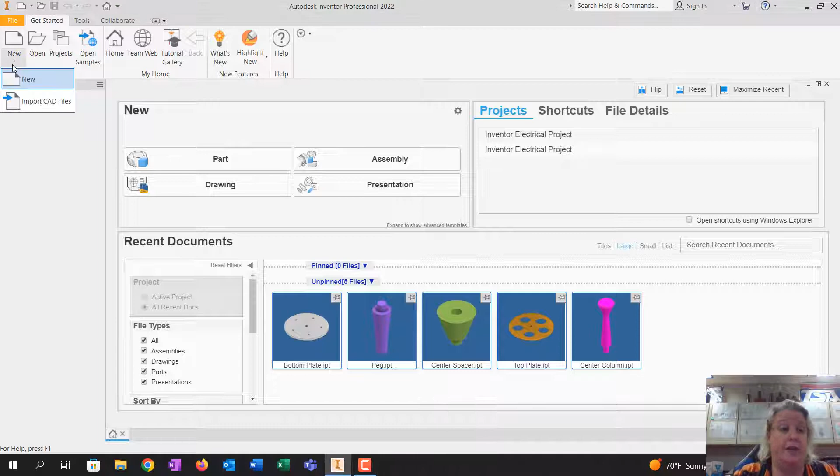So let's go ahead and do the assembly file. We're going to go new, and we're going to pick standard IAM, which is the 3 blocks. Hit create.

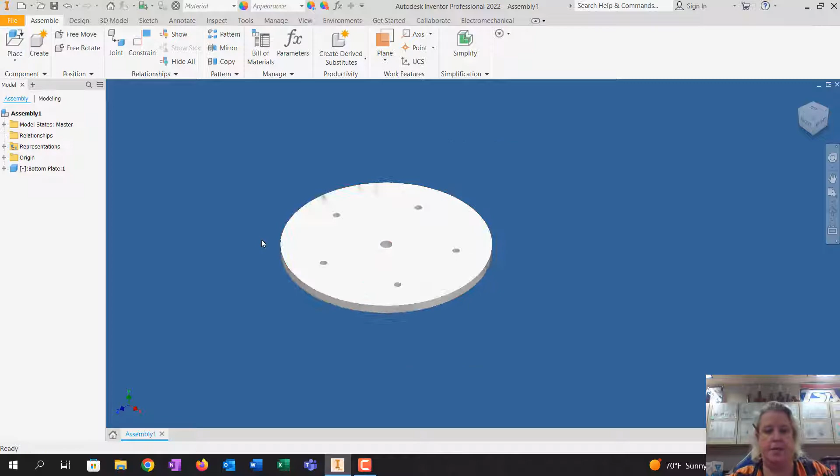We're going to click on place, pick place. Navigate to that folder that you made on the desktop that hopefully you named beverage holder. Select your bottom plate, click open, hit escape, zoom out. Remember, you want to try and keep them from not touching each other - it just makes your life a little easier.

And I'm going to put all these pieces in. Now the top plate is coming in. Now those pegs, you need 5 of them. So I'm going to click on peg, and then I'm going to click 1, 2, 3, 4, 5, and then hit escape.

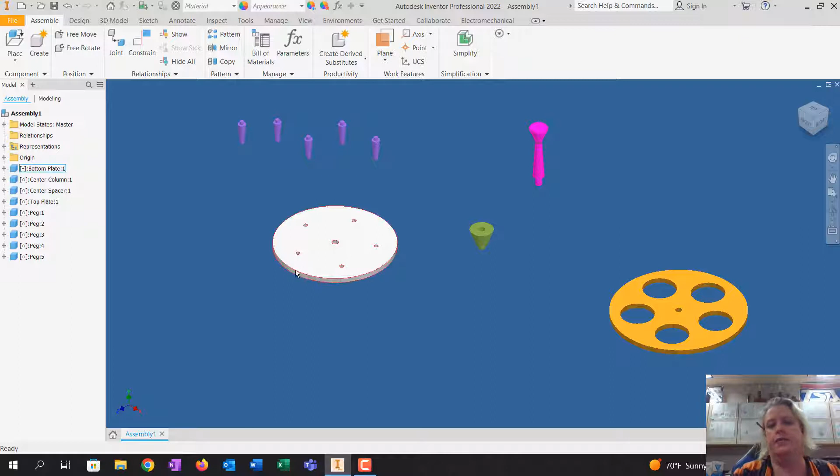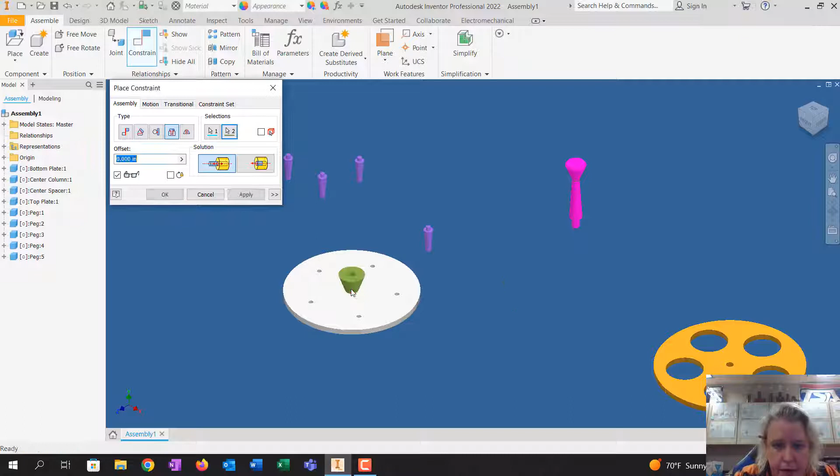Okay, so we're going to use the insert constraint, and I'm going to put this guy in first. So I'm going to click constrain, and I'm going to use the insert constraint, which is the one that looks like a screw. Then I'm going to catch this circle here, because this is the one I want touching the top here. And see how it fits in nice and neat, and it gives you that little click - that's what you want to hear.

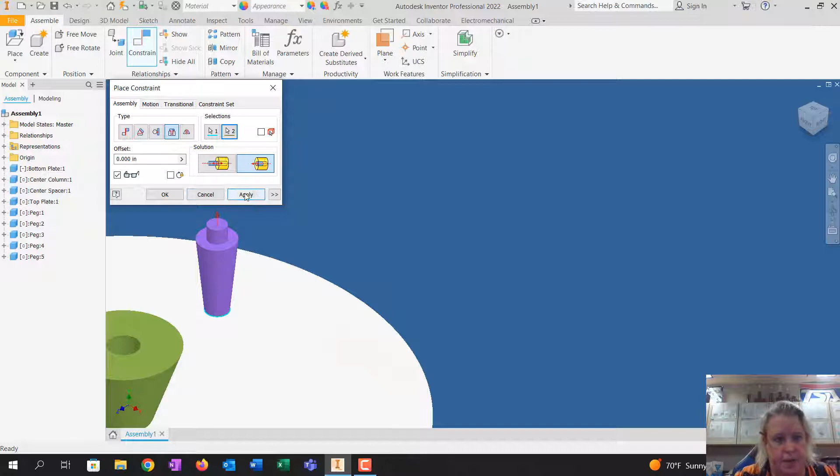Now the pegs can be a little tricky. Again, insert. I want that circle touching this circle, and see, it wants to go in upside down. So you can click this and that'll flip it. And to make sure you did it right, when you flip it over, you should be able to see it.

All right, constrain, insert, get this guy, get the top of the circle, flip it, apply. Same thing here. And because I have that turned on, it did what I wanted it to do.

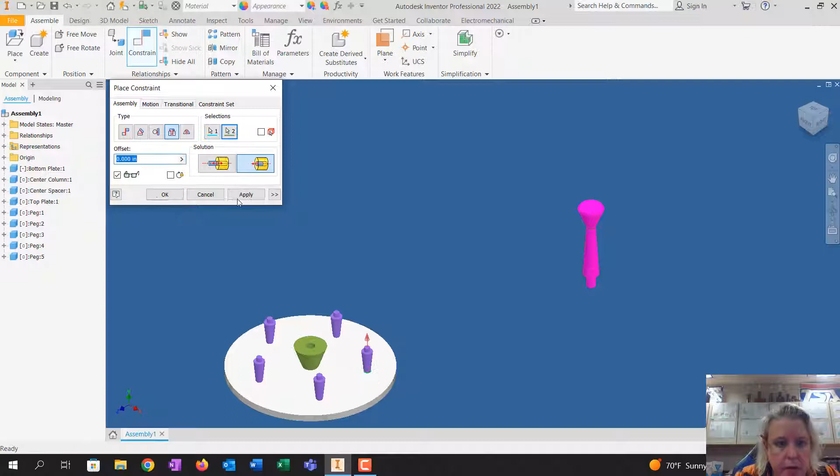Okay, now we're going to put the top plate on. This is where things get tricky. You don't have to get all 5 pegs in all 5 holes.

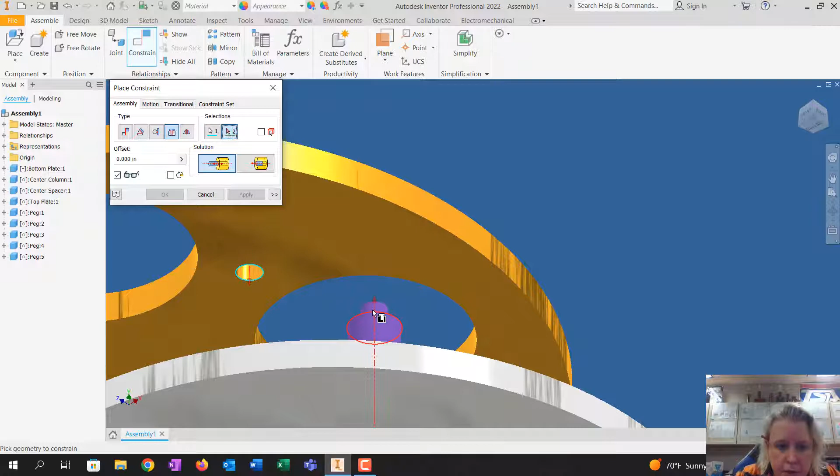Probably need about 3. So insert, I want this hole touching, and it's the kind of underneath one here, this piece here. And see how it snaps into place?

All right, the next thing I'm going to put in is this center column, because that's going to help us. So I'm going to pick insert, I'm going to pick this, I'm going to pick that, and it should go into that spacer.

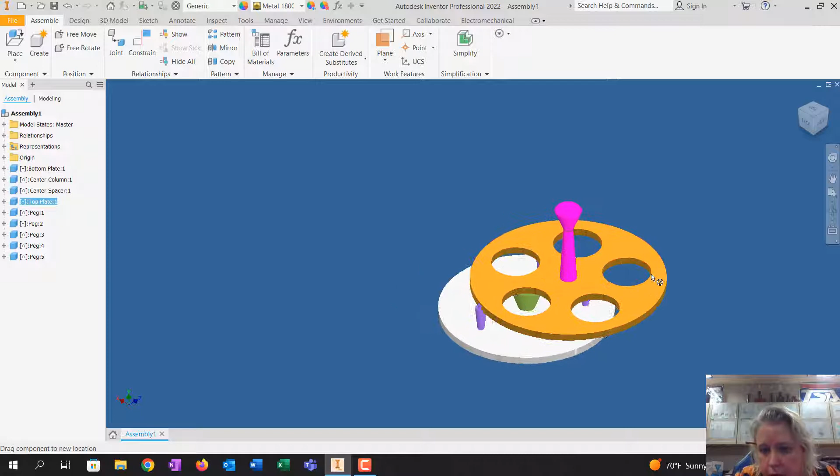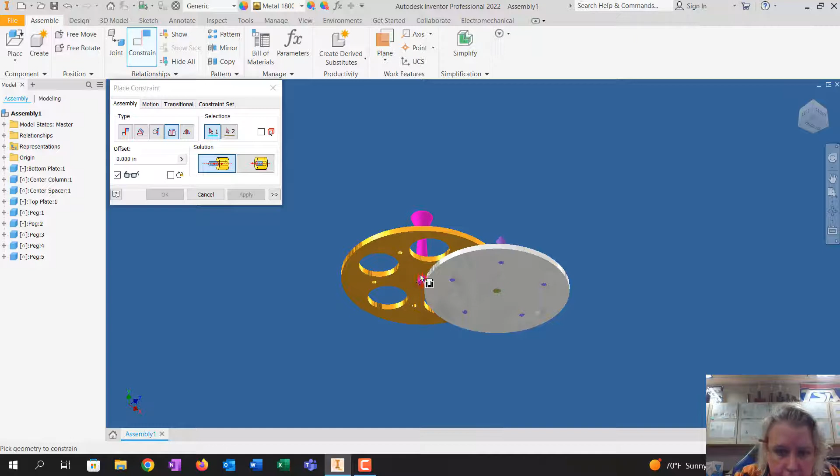And now we've got to mess with it - now we've got to put it in the spacer. So I'm going to click constrain, insert, and I'm going to click this circle, and I'm going to click the top of the spacer, and you can hear it pop into spot.

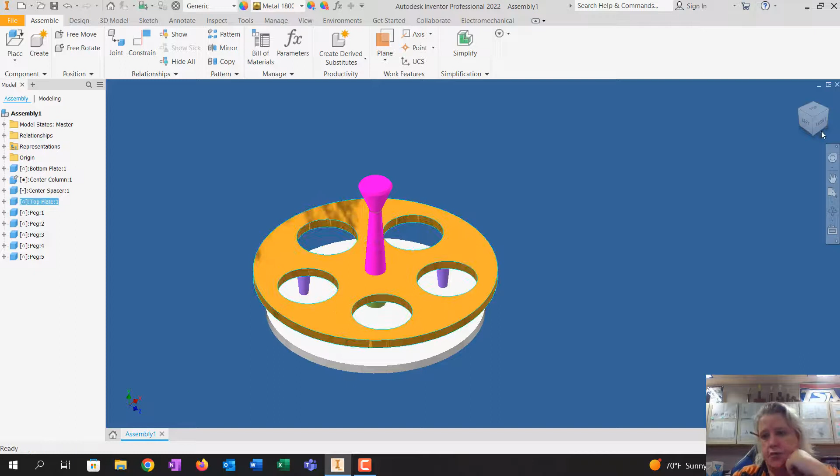And now if you right click on the center column thing and you ground it, you should be able to turn it and stuff should not move. If you see pegs moving, you did this wrong. Like, the pegs should move with the top piece, but they shouldn't show up through the big holes, because that's where your beverages go.

Okay guys, so give it a try. Usually if it won't fit together, you drew the pegs wrong, or the circle that the pegs are supposed to fit into, those little holes weren't drawn right. Let me know if you need help - this is the tricky part.